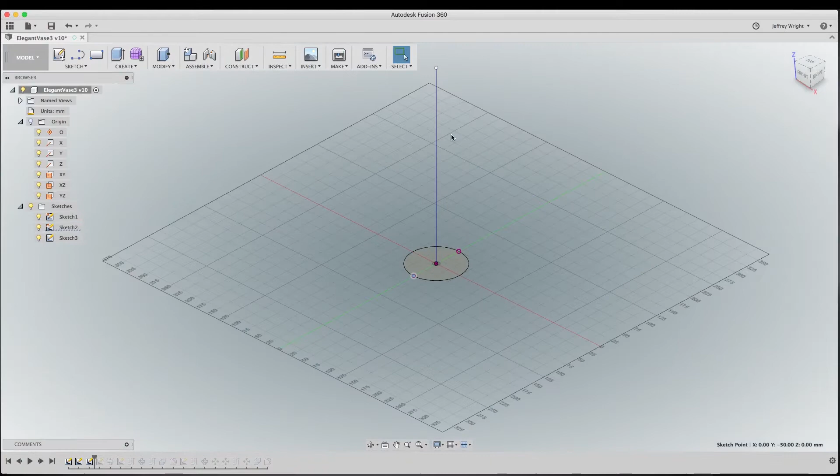Once we had that down, we put our center rail in to determine our height, and here we made this 350 millimeters tall. The next thing we did is we anchored our spline to that point that we projected and created our curve, and make sure it ends at 350 millimeters or the sweep object won't work properly. And of course, the next thing we added was our sweep.

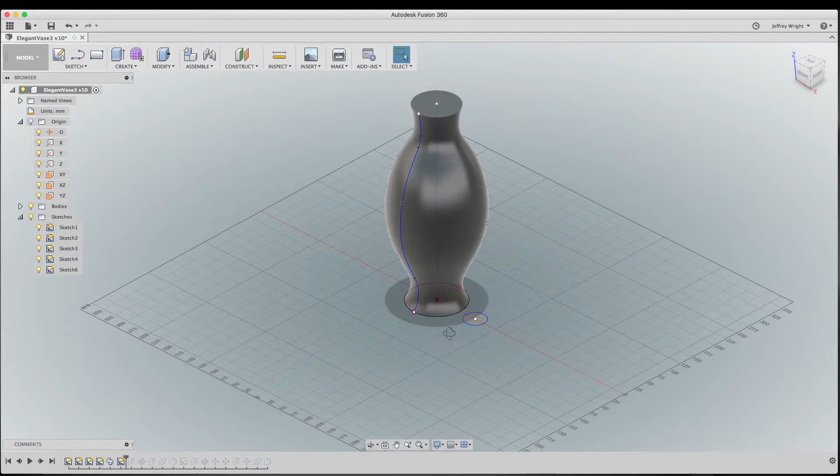After that, I created a sketch for the notches, and this is for the larger notch. So I basically set this right where I wanted it. You can see where the intersection is almost dead center middle there. And once I had my sketch in position and I was happy with it, I extruded it just a little bit, just so I had some geometry to run my circular pattern, which I did next.

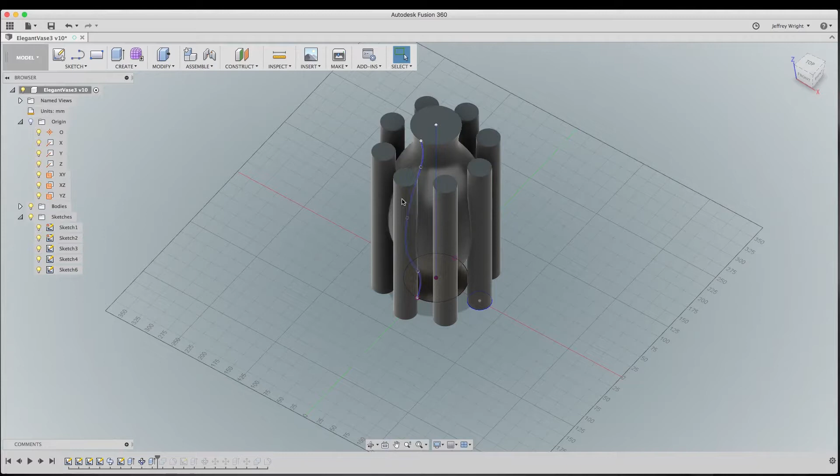Once I had my circular pattern, I did another extrude, and I used the cut command within the extrude menu to make these notches within the actual vase. Once I had that done, I went in and I did a small fillet on these edges here. The next thing I wanted to do was to create the sketch for the smaller notches. And I started with a basic sketch.

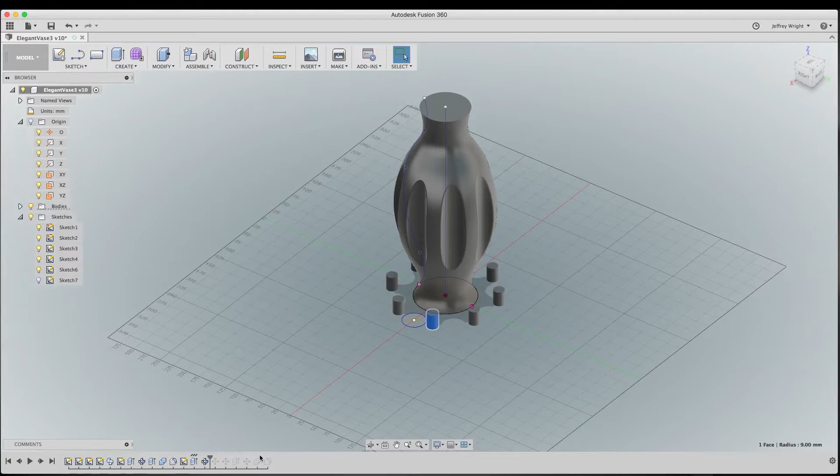I did another extrude. Once I had the extrudes done, we move this forward in the timeline. Here's the extrude here, you can see it. And then once I had that, I did a circular pattern. I moved them into position. Moved them up where I wanted my notches to be.

I did move them around a little bit a couple times, and what I ended up doing was doing an extrude and then moving them into position because the notches weren't quite long enough and they were leaving flat areas at the top.

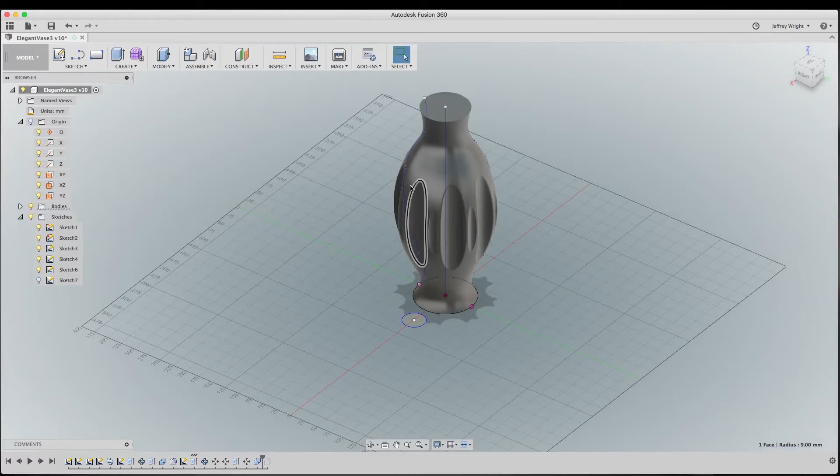They weren't quite long enough. Once I had that done, I did another fillet on all the edges just to make sure we had a nice smooth surface for everything. And then I combined everything to make sure everything was good. If we turn off our sketches here, you can see the final model.

Once you have your model sketched and modeled and you're all happy with it, what you need to do is go under this Make menu and go to 3D Print. Make sure you select the mesh, and if it's multiple meshes, you'll see multiple objects here, so you'll have it right.

I did not use the Send to 3D Print utility. I just trusted Fusion 360 to create good geometry. You can preview the mesh - I can click on this, and it may take a second to preview the mesh, and it'll give you a triangle count too once it finishes previewing.

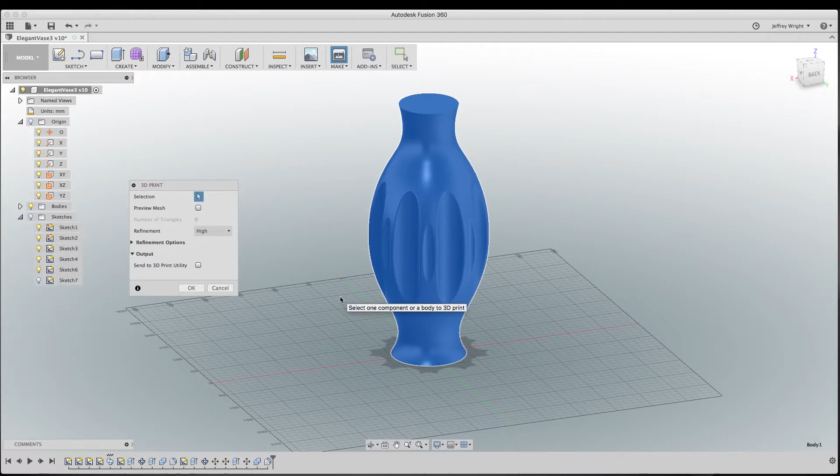So we have 96,000 triangles. That's not too bad, so I'll turn that off. Once you're happy with it and you don't want to go back and make any changes, just hit OK and you can export out your STL file and then send it over to your favorite slicer. And that's how we created this very cool notched elegant vase here in Fusion 360.

So you saw how I created this in Fusion 360, and it's a pretty simple process. It's pretty much the same process as I used for my Elegant Vase models. The only difference is we created some geometry to create the notches within the center of the vase. Once our modeling was done, we sent our STL file over to Simplify3D for slicing.

In Simplify3D, we used a 0.2 millimeter layer height and we enacted vase mode. If you're unfamiliar with vase mode, it's the single corkscrew outline printing method. Basically, your extruder will lay down one continuous line of filament and slowly raise up until it completes the model. It's a very cool printing method.

We ran this out at 60 millimeters per second. The total print time was about 9.5 hours for 350 millimeters of build volume. And I think the print turned out awesome. I am super happy with the results.

I love this design, it's very, very cool, and I definitely will gMaxSize this at a later date. But for now, I'm very happy with the print. There are no blobs, there are no globs, there are no layer skips. The surface finish is really, really nice.

For vase mode, it's actually pretty sturdy in the center. It's pretty flexible at the top because it's only one perimeter. But in the center, because of all this geometry, it's actually pretty sturdy. And I'll post the files up on Thingiverse so you guys can download and print this yourself.

And it's definitely a functional item. If you printed this with multiple perimeters, I think it would hold water and would act really good as a good household item, and you could probably use this as an actual vase. Because it is a little bit wider at the bottom with a big midsection and a narrow top, which is a typical design of most vases.

And I think this design is very, very cool, and I'm really happy with the results. I definitely will be printing out this and some other materials and finishing it in the future.